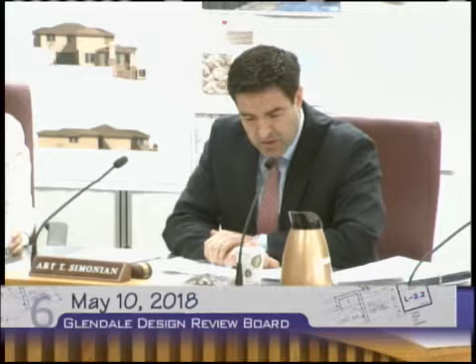Yes, thank you Mr. Chair. This project is located at 3455 Downing Avenue. The request is for exterior remodel and construction of a new 1,066 square foot second story and new porch areas on the ground floor. The existing 1-story is 1,259 square feet, and it has an existing 380 square foot detached 2-car garage, and the size of the lot is 6,500 square feet. The project includes exterior remodel, the new second story addition, the covered patios, and the new front porch, new colors, materials throughout, and windows, etc.

So briefly, the project does have a variance that was approved recently, back in November of 2017, as it relates to the increase in height which would trigger increasing the setback area, so they got a variance for that to maintain the existing setback along the south side.

Regarding the design, staff is recommending return for redesign, and I will briefly go over the reasons why. The project site is located in the R1 FAR District 2 zone. Downing Avenue is located in the Sparr Heights area in North Glendale. As it relates to site planning, staff didn't have any concerns really, so the site planning seemed to be consistent with the existing conditions as well as the neighborhood fabric.

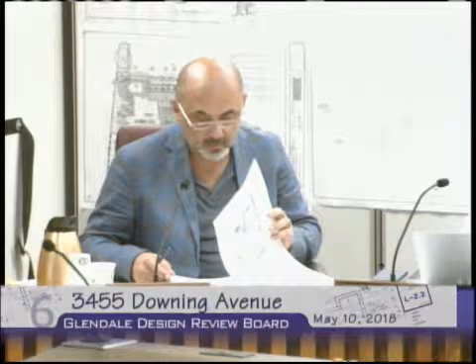Does staff have a copy of the window schedule, or have they provided that before? No, I don't have that at this time. Okay, thank you.

So with that, we'll go ahead and open the public portion. Mr. Girgos?

Good evening, Mike Aragus, 2155 Verdugo, number 614, Montrose, 91020. Thank you for taking the time. We're in agreement with the majority of the staff report, except for a couple of the large items, and I want to address those right on.

We have one additional letter in addition to the exhibit in front of me, which is that the owner went around with the plan. I purposely did it so it had the elevation, the site plan, and floor plan in it. As you can see, all the red dots are the adjacent parcels, all the adjacent property owners who are in agreement with the project and feel it is consistent with the property. I also have an additional letter from the neighbor directly to the north.

Within that, I think we can look at two items: one is the appropriateness of the 2-story, and the second would be the massing and pitches, if you want to group it that way. If you look at the 2-story study...

There are two stories at the end of the block, on the upper block, and just past the 300-foot line there is another 2-story. So it is not an unusual idea to have a 2-story in that neighborhood at all. I've personally done 3 homes on Buena Vista, one street over, and 2 on Rosemary, 2 streets over, so it is not unusual.

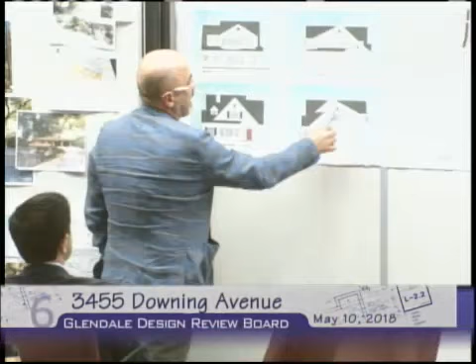So I want to understand what is happening. Why is this there, and why can't this happen? That pitch is reaching to the front wall. The ridge and the roof behind is pitching to the previous.

If I can come up to show them - the pointer's at the corner there. This pitch is relating to the front wall of the house, which is here, so it is pitching up to the front wall of the house.

But when I'm looking at the front of the building, this one is pitching from this wall. There is a break line there, you're just not seeing it - it's right there. There actually is a line, but it's being cut off by this form.

So I'm not sure I understand. That is this one here - that's this right here, is that the ridge? Right, so it's being cut off here, and it hits it partway, which hits it here.

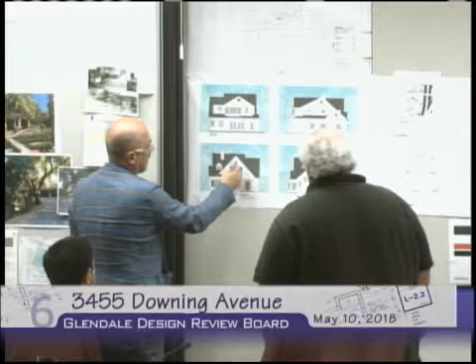But then this is in front of that - this is coming out, not in front of that. So then what happens?

That is the bathroom here, there's a little tucked-in roof, that roof line at the top there. The main roof is coming - this roof here is pitching off the front wall. This section is coming off of the back, this reduced section here.

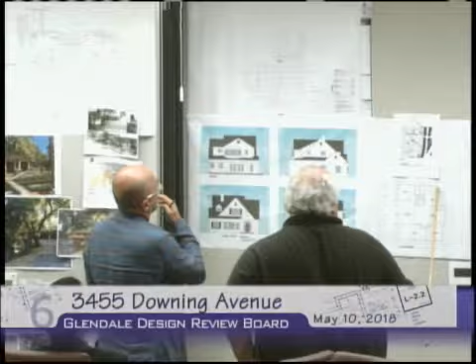So you have 2 pitch points, they're all coming from the back wall. It's shorter on this one than this one, so that's why you have the break happening at that point. That's what's developing the break.

So my other question is, you have all these bump outs that are there, and you're taking out some of these - you're placing windows right on the plate heights, and you're taking these walls out, taking the entire roof off of this building and having these new openings with the framing. These are existing openings - all but this one existing.

There's a bump out in the - if you fix that, then you have to probably reframe that most probably. And then some area here, these are not existing.

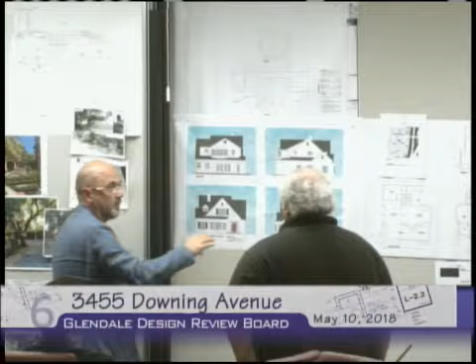So by taking the entire roof off, you took out 50% of the building. So any window or framing opening, essentially you're literally going over the 50%. Well, those are existing doors on the back - that's an existing door, those are existing windows, the only one was one French door. So have you done the study?

50%, assuming that we had existing windows here - these are all existing windows, and there's an existing French door, and we're adding one French door. But did I do a 50% count? Yeah, I did a 50% count. And you don't have a window schedule, right? I don't have one, yeah.

But how necessary is that small dormer at the bottom right side of the roof? It's for the plan, this bathroom. I mean, we could take it out. It could turn into a shed if you wanted to minimize its effect.

It could go, that could go. I like the idea of it sort of balancing the three. If there was a reduction of one, so that there was an open section here, but it could go. I mean, it would be flexible. It could also be a shed if you wanted to minimize the effect of it.

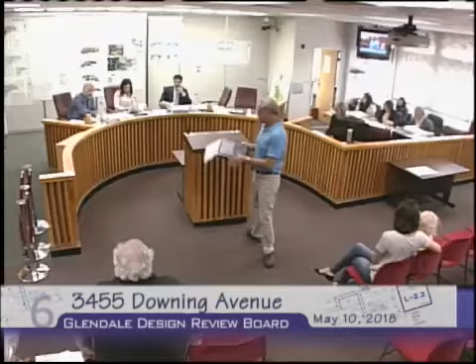Right, it's pretty good. Gabriel Lefevre, 3471 Downing Avenue, Glendale, one of the neighbors. I feel it is appropriate for the neighborhood, and I'd like to see it happen. I see one and two story houses all over, and I agree with what Mike had to say with regards to creating a nice place to live without extending through the backyard. You have to kind of go up to be able to save some space for the rear yard.

And you live north or south of the property? I'm the top dot on the corner of Sunview and Downing, on the left-hand side, 3471. Great, thank you for taking the time to come down.

Next speaker is Abigail Imburgia? Wow, you guys have a hard name, I know it's a hard one to pronounce, Italian. Today it's Italian, it looks like Imburgia. Well, welcome anyhow, Abigail Imburgia.

I live at 3508 Downing Avenue, so I'm on the right side of the block, three up on the right. I feel like it is appropriate. I've been in the neighborhood nearly 15 years, so if I look at the neighborhood as a whole, not just Downing Avenue, on the lower block there are two two-story houses, and on the upper there are two. I think this is by far the most aesthetic one that we will see if it does get approved. Even going throughout the neighborhood, there are some great ones and there aren't. I really feel like this would be a great addition. From my house, you probably haven't seen it, but they've put up the...

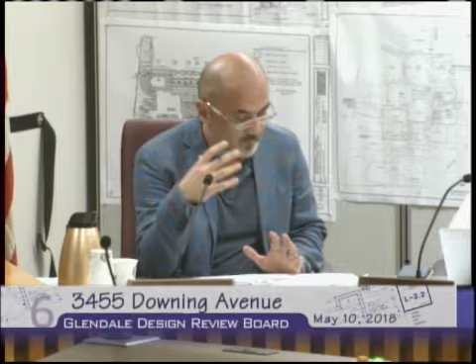Okay, Mr. Malakian, you want to start us off? Sure. So as usual, Mr. Garagos has done a really nice design, and it's always been a very consistent, overall cohesive design that he proposes.

It's always challenging when you try to take an existing structure, existing bones of a structure that is completely designed and intended for a different style of architecture, and try to incorporate that into a whole new style and whole new character, adding a second floor, utilizing a lot of the openings and trying to make that work with the function that is. So I commend you for that.

I appreciate all the efforts that has gone into trying to incorporate some of these roof lines and some of these windows and openings that do exist, and the new ones that have come together. I also understand the concern that staff has, which I kind of have the same concern.

Obviously this is not going to be the only second story, as the homeowners association representative is here, and I don't oppose a second story addition. I don't oppose even if it's setting a precedent in that street context of having the first second story, as long as it's done appropriately, as long as they're cautious of what they're doing and conscious of the neighborhood and the adjacent neighbors.

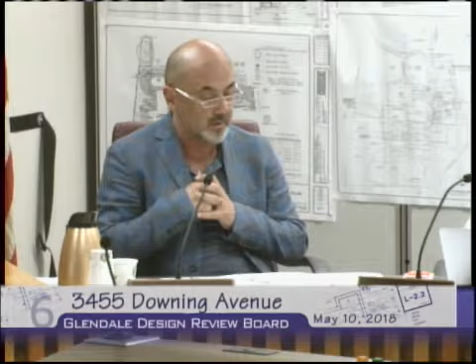The section that I pointed out, having the ridge come to the end of the wall there, I understand, but is it necessary? Can it change? I don't know. I want to see what happens if we do remove that. What happens if - and if I had the sections, then I would have probably guessed right now.

There's certain conditions here that make sense inside, but outside, for example, the dormer, the small little dormer window that is next to the restroom, that is right against this larger volume along the front - it's kind of out of scale. And then you got this, randomly, a chimney coming out from further back.

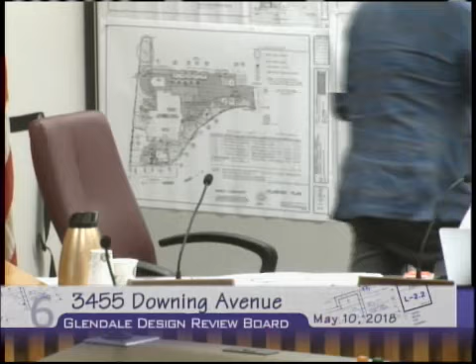So you have these elements there that I think takes away from the simple, clean look that I think it's asking. Possibly if that dormer had a little bit more space between the ridge, and this was moved in so that it actually sits alone on its own and has a volume. So there's certain things that may be improved.

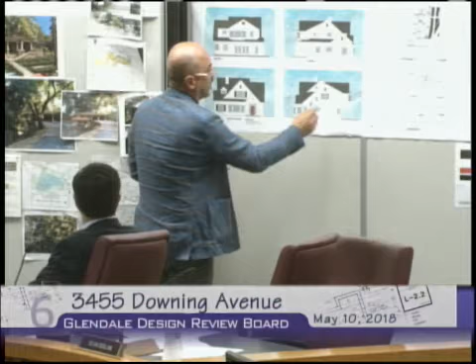You have a window here that you want to push up and go right at the ridge point there. I understand why these are there because of the stairs, but again, does it make sense? Can it be one larger window that plays with some of these types of windows that are there, or can it be just one round? I don't know what these are, but these are just fine-tuning some of these elements.

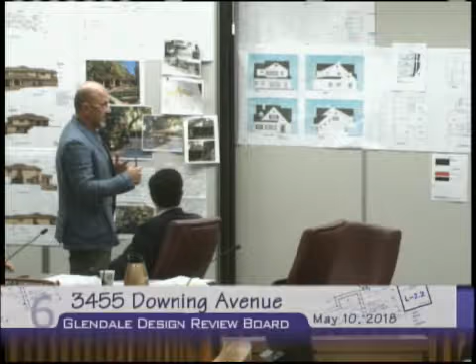I don't know if bringing all these consistent pitches in will help, but I hear the architect speaking, Mr. Garagos, and I understand, it governs for that, the style that we're looking for. So it's not bothering me.

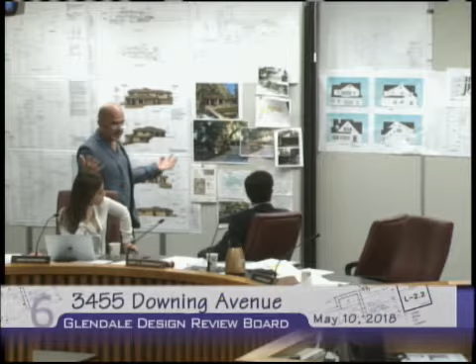But what is bothering me is the over-excessive mass that has been created by the design in relationship to the neighborhood and the neighbors and everything. So for me, possibly if we can cut this off, lower this, literally make this - I don't know if that would help the situation, or we may come back and say what we had originally was a better design, we made it worse. So honestly, I don't know.

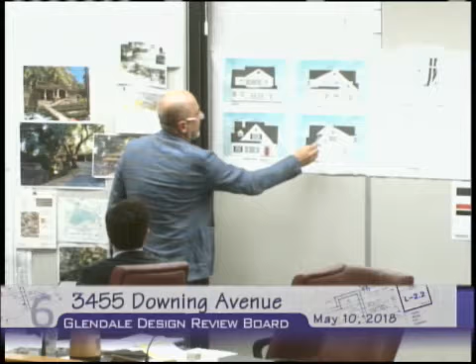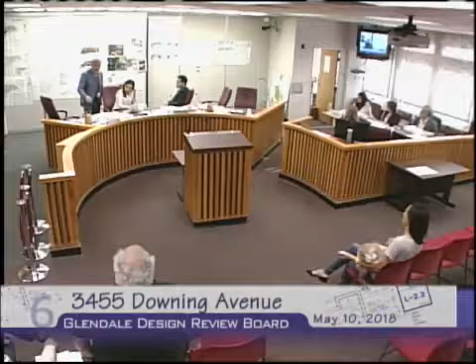And can it be that maybe we don't want to have this, and somehow - I see these happening, but then from the front, when you're looking at this, you're looking at the elevation. You want to see the perspective, and that's another thing - we have an older perspective. It doesn't have the windows and everything else, but you can see everything is happening.

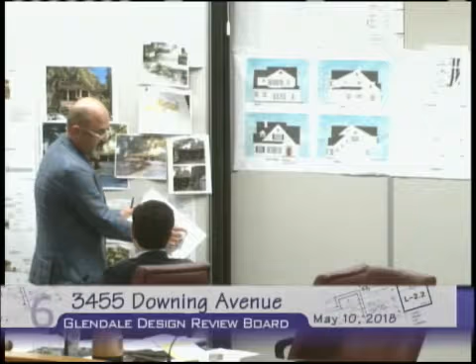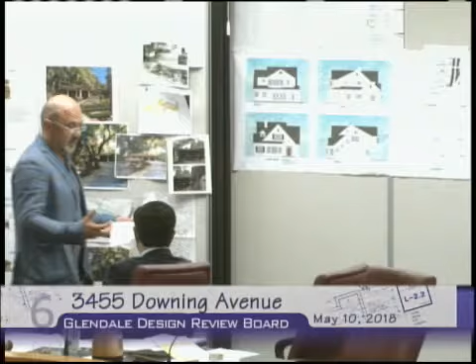I like the roof lines that are coming, their volumes, but then the smaller little volume that is coming out for the entry - does that really help? It looks beautiful from the front, but when you look from the side, it's just very small. So those are the things that may need some improvement to make this feel a little bit less massive rather than what it is now. But again, I think it's a very nice design.

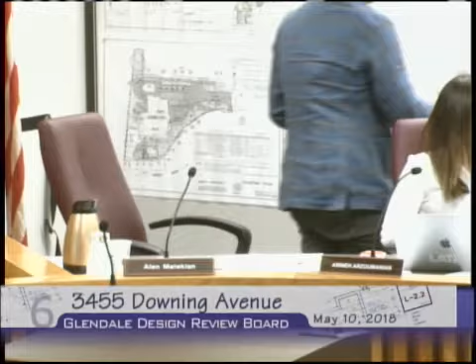It's kind of unfortunate for me to guess on a lot of things. I would have liked to see the existing elevation compared to the proposed elevation, to see what is actually happening. Because to me, the bay window that is there, the roof line, it seems like we're trying to reuse the existing, but it's not. It's actually a brand new roof because it's just not possible for it to work. So that's where the question comes: what's new and what's old? How much of that is being affected? That's my concern.

But in general, going down the list, I agree, and I think reduction of the mass would help the project, but there's not much we can do about reducing this because of the style we're looking at. We can't completely redesign it because I really like the design, I think it's a very nice design. But what is going to happen if we lower the ridge line? What happens if we get rid of that upper ridge portion? Is that going to help? I think it would, but that's just me talking, and I can't imagine what impact it will have on the design.

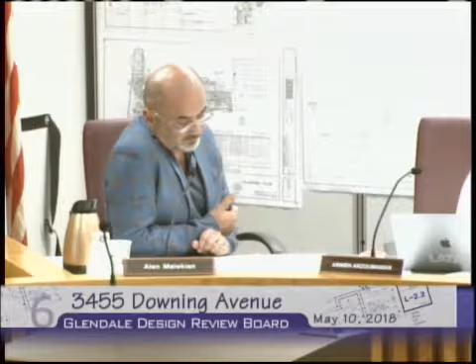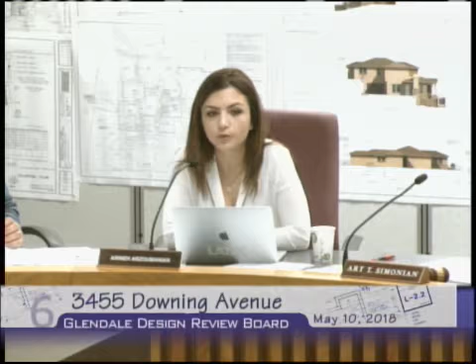I agree with you. As far as the mass and the scale goes, getting rid of the ridge and making some little changes would definitely help. But as far as the overall design, it looks fine. And I understand if you make those changes to reduce the mass and scale, it may jeopardize the style, so it's going to be a balance. Our architect would know better how to do that. I wanted to thank the owner for reaching out to the neighbors, we usually don't see that happening before they get up here, so I really appreciate that, and I appreciate the neighbors coming down here expressing their support. Overall, it's a great design, it seems to fit the neighborhood.

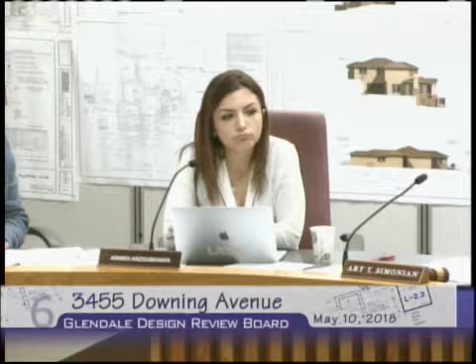I tend to agree with Mr. Malikian. I understand that the mass and scale can be reduced, but how we're going to do that and what's going to happen next, you can't really tell. So I feel like simple modifications to the details happening right now in the design can address that and it would be fine.

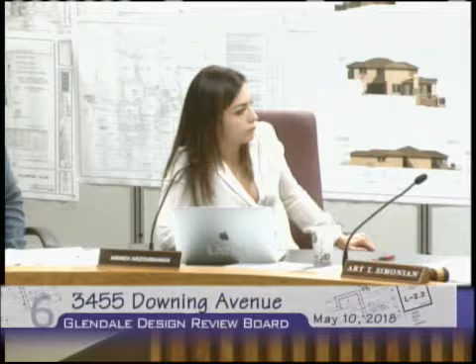Thank you, Ms. Arzumanian. I'm going to echo and say we very much appreciate you reaching out to the neighbors. It's always nice when that happens, and also for the neighbors taking the time to come out and support it, because most of the time what ends up happening is people coming down and objecting to a design, as opposed to people taking the time, especially with young children, to come by and encourage an owner and a design.

I agree with what's been said. I think it is a well designed concept. It's not an easy one, especially when you have the openings at the lower level and you're trying to match some window lines above it, and then trying to fit certain bedrooms within a certain roof line that needs to be somewhat centered. It is very difficult to make this work with the style that's been picked. Once you have these overarching pitched roofs, it's very hard to place spaces within them on the second level.

I tend to go down the route of maybe approving with conditions as opposed to returning for redesign. I also think the roof plan could be simplified. It took me a little while to get my arms around the design because of the different roof pitches. When I'm looking at the perspective, which to me is the most telling part of the package and the rendering, that's really where it comes together for me, because the two-dimensional aspects, especially with some of the lines disappearing on the roof where one plane stops and another merges, are very hard to comprehend without the rendering.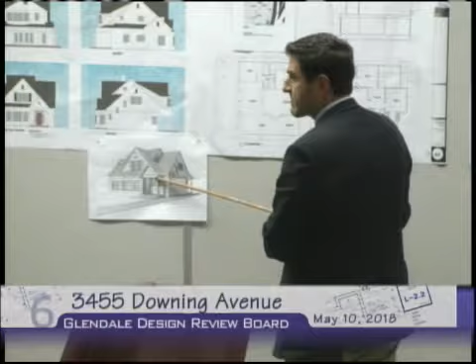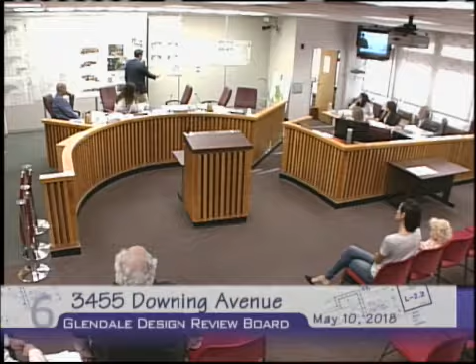I agree with Mr. Malekian. This additional pop-out on the porch seems to convolute things, and it could probably be simpler if this roofline kind of, I should probably stand on this side so staff could see it. If this roofline kind of continues, I think it'd be better served if maybe this top portion was removed and then we had a simpler ridge.

And Mr. Malekian alluded to it. Now, we don't have enough sections to understand what that would do, but perhaps they could work with staff on that. And I do think that this dormer, the way it pops out, is unusual. That would be the small dormer? The small dormer here, yeah.

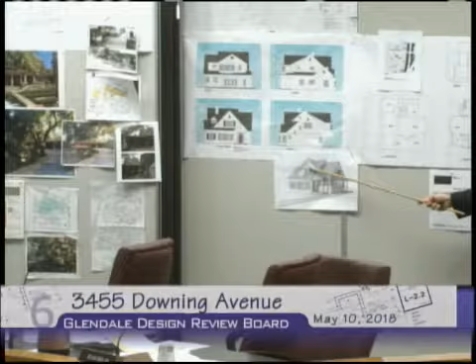I think in general, though, where we would like to see this line up, the lower level and the upper level, I think it'd be too difficult to do while still trying to keep this bedroom on the top level and still trying to get this roof pitch. So I wouldn't want to impose that.

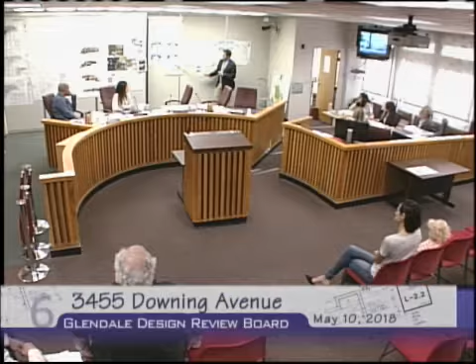But I think some of these simpler approaches of reworking these windows, reworking the porch where it doesn't really pop out with this extra roof, trying to get rid of this little dormer and continuing the ridge, or maybe deleting that dormer. I think these are simple enough things.

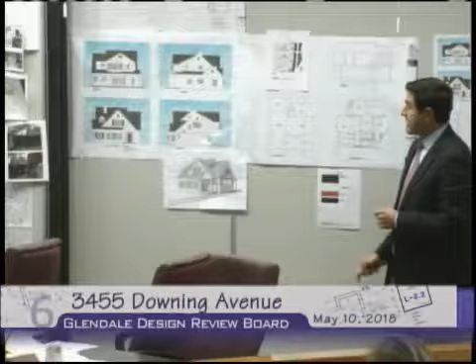Now, I don't know the removal of this ridge, what that would do to the space. I have no idea. And if it comes down to it, if we gotta prescribe some conditions where it's just not possible based on sections, where it becomes an unlivable space, then maybe they need to either come up with something else or work with this. But in general, those would be my comments.

The rest of the conditions that staff has set, conditions 3 and on, seem reasonable. So I guess the first place to start is, is there support for this?

So my question to you and the staff is, with these conditions, would staff be comfortable rather than, I know there is a reason for you guys requesting a return for redesign. Would you guys be comfortable with the conditions that we put in or the changes that we did?

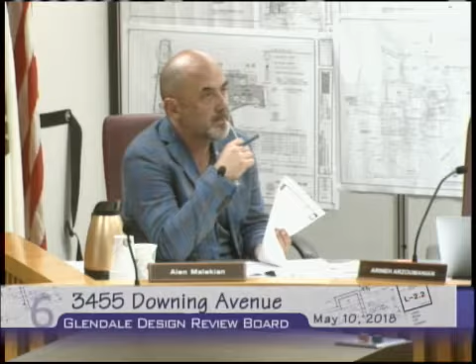If the conditions are as straightforward as I'm writing them down, sure. Because it opens up some uncertainty, and I heard Mr. Simonian say if the rooms aren't livable and that changes the design dramatically, we'd have to then bring it back to you. We can do that. I'd rather have a little more certainty visualizing what you're envisioning.

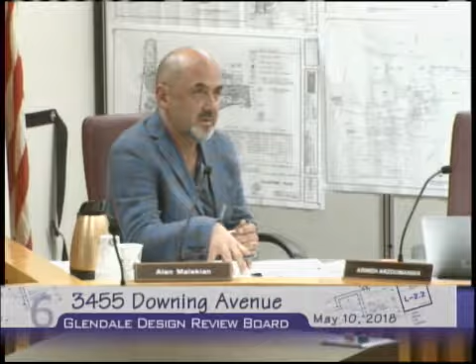See, the thing is, and I was going to make a point of this, I want to make sure, I don't think it's fair to all the applicants that come in front of us that go through all the headache and all the requirements that they have the list of requirements. And when we are getting not a complete set, and the set that we have, then we have to guess on certain things, and we have to guess on the conditions that we're putting in, what the result is going to be.

Can you elaborate a little bit? Because I mentioned the lack of a section, but there is a section, and there's a roof plan, so it sounds like you want, because I went through the list. Yeah, the drawings there, the drawings that we have, and it's not staff's thing, but it's more of the applicant that needs to.

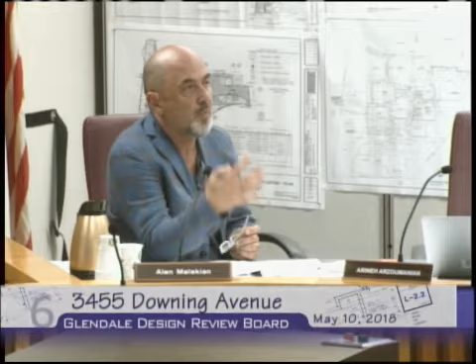So additional information. Exactly. So applicants. So I'm not trying to say staff has taken this, but what I'm trying to say is that staff should tell the applicants that it's a complicated design, or the information you need to give more so we understand what we're reviewing. Let me give you an example.

Like, for example, this dormer, right? So there's no way I can understand what the impact of this dormer is other than just looking at this. But in a true drawing, an accurate drawing, you would see part of this dormer on this plan. So you would actually visualize. I can see this three-dimensionally.

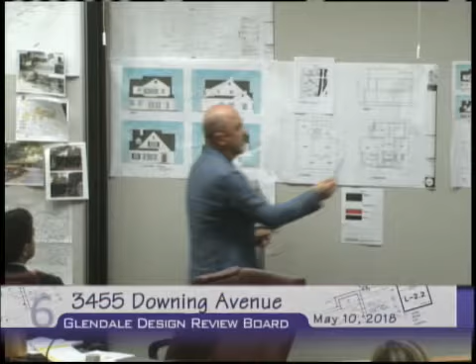Or when you're looking at this attic and this window, right? So if you're cutting this through here, then you're going to see part of this roofline coming up from here. So you can see, understand, and feel what this thing is doing. And so when applicants are not really presenting the big picture for us, then we have to start guessing on certain things, right? And so one section meets the requirement, right?

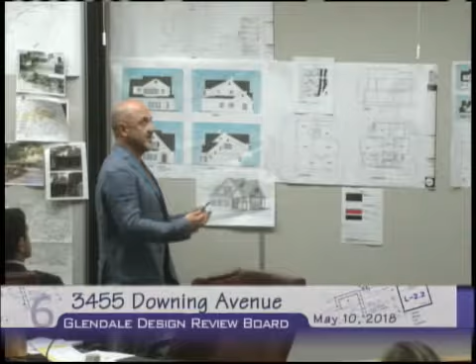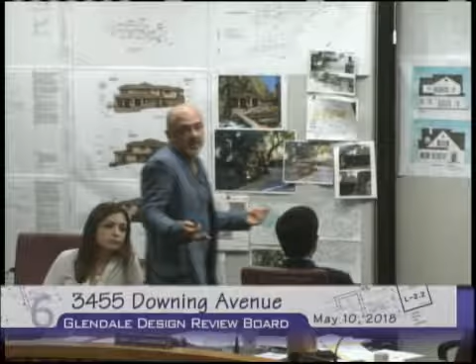Staff should tell them, listen, if you want this to go through smoothly, maybe add a couple more sections, maybe add some details, maybe add certain things for us to understand. Because right now if I say let's remove this, like Mr. Simonian said, I don't know what it does. Can they put it somewhere else? Is that going to impact things? Or if we lower this, how is that going to impact the overall design?

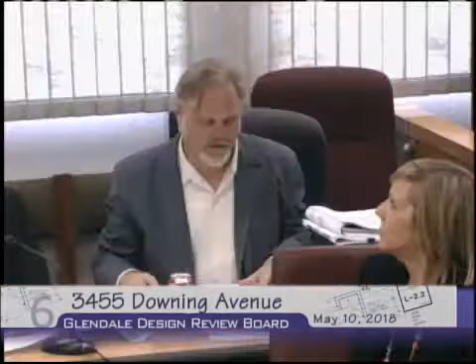Going back to the question, part of our problem, we could certainly do this with an approval with conditions if it's these kind of smaller things you're asking for. We agree with what the commission or board has said about the quality of the design. We found aspects of it a little awkward, but overall it's a nice looking colonial revival kind of house. But we were concerned about the massing at the second floor being quite at odds from what the board typically approves and from what our guidelines tell us to do.

So if you're telling us that you're comfortable with this massing, that transfers into future design review meetings we have with applicants, where we could say the board has been comfortable with this kind of thing, and maybe we don't have to push second floors in as much as we often ask people to. So that's the place I'm a little less comfortable unless you give us clear direction that you're really okay with the verticality of the side facades.

I'll speak for myself, and my colleagues can speak for themselves, but I'm okay with the second story. I appreciate staff's comment regarding massing, and that's my concern as well. My recommendation, and I think we all agreed, is to cut the upper ridge to lower that.

The concern that I have is I don't know if it will do its job—whether it will reduce it enough for me to be comfortable by lowering the ridge line or changing the pitch. Those are things that are going to impact the design itself. With my limited knowledge of what is happening with the design, without knowing all the roof lines and everything that's coming, I thought that if we take the upper portion out, maybe that will help. I don't know.

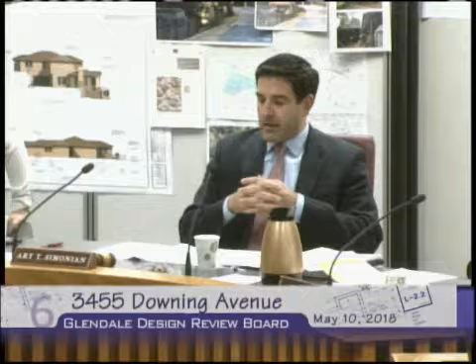I think more or less we had similar conditions as far as concerns and ideas. I'm hearing from staff that they will be able to work with the applicant, and I'm hoping you get some of these conditions and are able to come to staff with a design that is livable, that more or less doesn't change the overall style that everyone's so happy with. Address what we're pointing out. Now, if at the end of the day staff is unable to come up with some sort of compromise, it would always come back to us anyways. So I'd suggest we put together some sort of condition based on our comments, or we could just have Mr. Platt read what he's got at this point, and then if you're all comfortable making a motion, we could move forward on such a case.

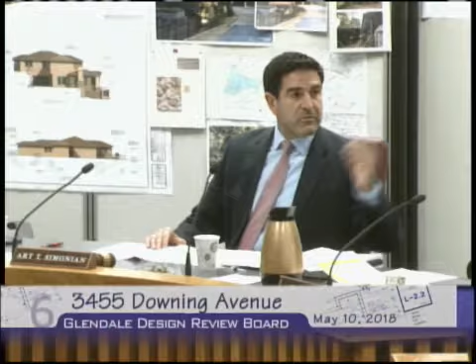Okay, can you please go over the conditions that you have at this point? Sure. It's a little scattered and may get a little repetitive, but I'll go through everything I've got and then we'll try to condense it.

In general, simplify the roof plan. This would include reducing the ridge height of the higher portion of the roof to match the ridge height of the adjacent side of the roof. Either delete the small dormer on the front roof, or depending on how everything pans out with the changes, find another location for it. That's hard to imagine, so I picture deleting it might be the way that ends up going.

Looking at the side facade, I'll call it the right-hand facade with the stair windows, there was a call to simplify that facade, particularly the windows running up the stairway, possibly with a single decorative window in that location.

We won't need to ask for more perspectives. I wrote that down, but we wouldn't ask for that for staff review.

The front entry volume, the board doesn't like the way it's kind of just pushing out. It's a very shallow projection. So I think the idea is to delete that feature and find some other way to provide coverage at the front entry.

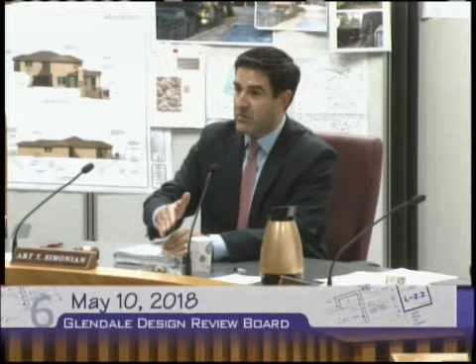Sorry about that. So we only have quorum until 7 p.m., and this is what I suggest. I suggest that we go through this as quickly as possible and everybody gets a chance to speak. And if we feel as though we're cutting it too close, then we'll basically continue the matter, and we're going to cut it off at that point where the public has spoken, the architect has spoken, the rebuttals have occurred, and it's a very clean break.

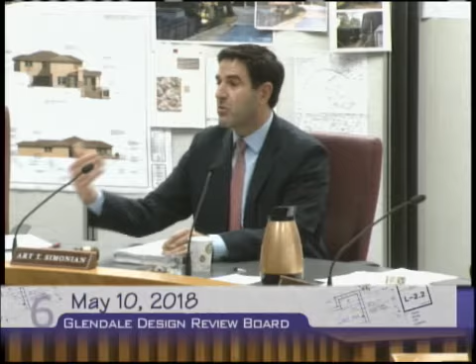At that point in time for us to move on and continue it. The other option would be, instead of providing the public with 3 minutes each, we would limit it to less time, 2 minutes. And if you've already heard what you're going to say, you would simply get up and say, I'm going to basically say what's already been said. So with that, I oppose the project, or I support the project.

I'm inclined to keep it at the 3 minutes, but if I get a lot of nods from everybody saying that 2 minutes is fine and we'll try to hurry it up, we could also do that. I'm not getting a lot of nods. So with that, we'll continue with the 3 minutes each like we always do, and if we cut it close, we'll continue it to a date certain.

So with that, we're going to open up 1627565, and our case planner is Ms. Ezzati, so please take it away. Good evening, and thank you.

This is a proposal to build a new 2-story, 4,114 square foot single-family residence at 1829 Kirkby Road in the R1R zone, FAR District 2. The new house will also feature an attached 3-car garage. The project involves demolition of the 2 existing residential structures on site, construction of a new pool and outdoor patio areas, and associated grading. The site is a 15,880 square foot irregularly shaped lot with double frontage on Kirkby Road.

During my presentation, I'll refer to the southern, wider portion of Kirkby Road as Lower Kirkby, and the portion to the northwest where the road is narrow as Upper Kirkby, just to clarify the two. The project site is currently developed with 2 residential structures: a single-family house built circa 1911, and the existing main house that was built in 1924.

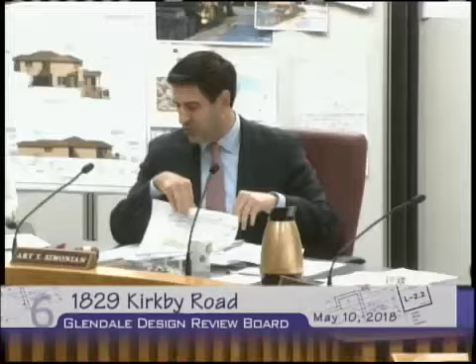Good afternoon, Mr. Chair, board members, city planning staff. My name is Vartan Jangosian, 1224 East Broadway, Suite 202, Glendale, 91205. I'm the designer of this building.

Vista presented everything, and I'd like to add a little more. We worked very closely together, considering and preserving the lot character, making a smaller grading job. On this project we have only 190 cubic yards of grading to do, and mostly it's under the footprint, which isn't even considered a grading job.

We worked very closely to minimize touching the character of the property, using stone we have on the property for veneer purposes, matching the character typical for that area. The lot itself is a double lot compared to surrounding lots, and we tried to work and make a better design, considering and following all the recommendations and conditions of the planning staff.

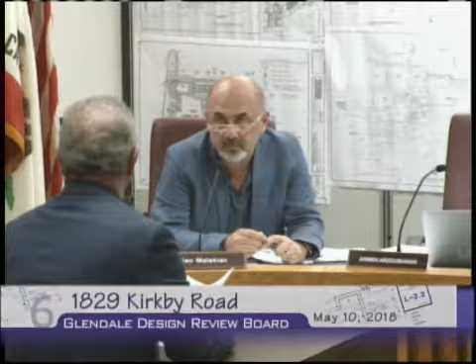If you have a question, I can answer. Do we have any questions? Can you categorize the style of the building? The style is craftsman, which is what the existing house was as well, and on the lot we currently have two buildings.

I wouldn't say the existing buildings have much valuable character, but it is a craftsman character. We have a two-story guest house in the back and a two-story house which is very old and looks like it was remodeled several times, with nothing left of the original character.

We are removing two buildings, and the footprint is almost the same as what we're putting in with the new house. Regarding one of the recommendations about the driveway paving, which is existing brick paving, we try to preserve that too, but if needed, we can reduce it and keep some people happy.

Do we have any other questions? One last question — you're proposing wood chimneys, wood burning fireplaces? No, that's not what's shown on the plan. We cannot do wood burning, it's gas burning. Maybe it was misspelled, but nobody's going to allow us to use wood burning anymore.

And when you say double lot, which lot — is this part of the property, this lot? In the APN it shows like it was two lots tied together, these two. Right now it's considered like one lot, but it used to be two lots tied together. But you're not doing any portion of the building on—

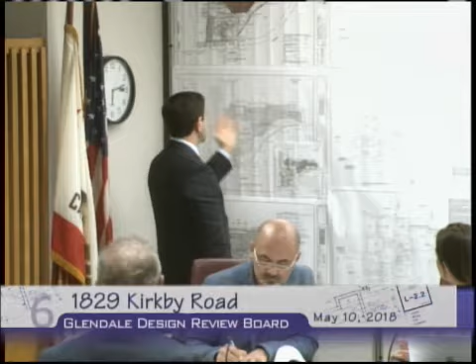There is a house right now that belongs to someone else. So when you say double lot, where is that — that's what I'm trying to figure out, where is the double lot? Even the existing driveways show it used to be two lots. I don't know exactly where the separation line is, but I know even the county assessor's office shows it was two lots tied together a long time ago.

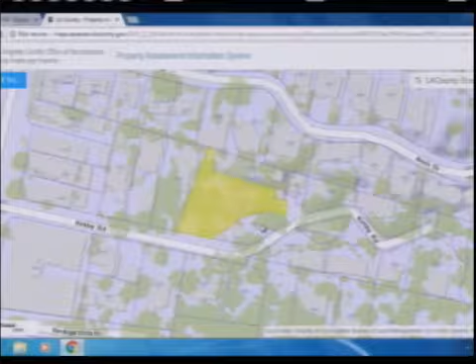So item C is the site plan shall show preservation of prominent natural features, native vegetation, and open space in a manner that is compatible with the surrounding neighborhood, minimizing the alteration of the terrain necessary for the development. It's just my opinion that this request to build 4,115 square feet home does not appear to meet those standards as it applies to the houses in the community.

Our house was built in 1911. The majority, this was not a planned development, and there's not much of a way you can change the street or any of the other houses around there to make it conform to anything normal. What they're talking about is a patio.

Since we have owned that property, that was a bridge that went from the street, and the bridge was made back in the 60s by some people that were elderly and could not go up the stairs to get to their house from the site where they're saying the garage and driveway should be, on the lower level of Kirkby. So a bridge was put in there to help those people walk across.

Maybe 30 years ago, I don't have the date, I don't have the time, but I have a picture, that was illegally backfilled by the owner that was up there. Thank you for that history, by the way. It's very helpful to find out about that bridge. Thank you. Sandra Brahmi.

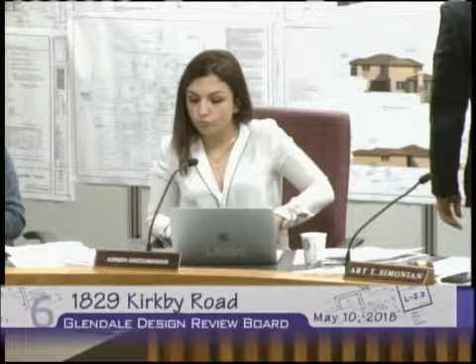As far as the parking and garage goes, I agree with the staff. I think the architect strove to minimize removal of the trees. So, I mean, I think that's the way to go. In order to minimize the impact on the trees, this was the right decision.

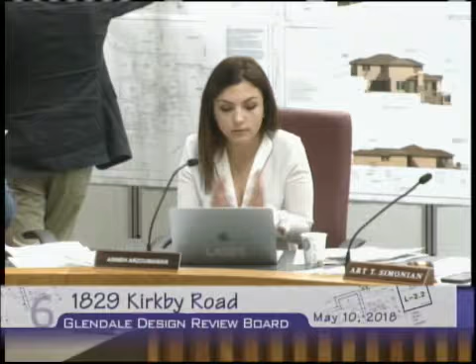I like the design. I think it does fit the neighborhood, and also as far as the mass and the overall volume goes, it's a big property in that neighborhood, and I don't know how it could be dramatically reduced.

That's where I'm at. I don't have any particular concerns. Thank you, Ms. Arzumanyan.

Thank you, everybody, for coming out and sharing with us the problems associated with this specific street and also some of the history. It's very helpful for us.

I agree with my colleagues in that the site planning and the way the house is situated, and the way you as the applicant have worked so diligently to reduce grading, is the right approach. We always like it when architects take the time to work with the existing contours of the site to minimize grading, because especially on streets like this, when you have many truckloads of earth being excavated and removed, it is a serious hassle for the adjacent neighbors, especially on a narrow street.

And so minimizing grading is a top priority. The architect brought up some thoughts as to why the garage was placed at upper Kirkby as opposed to lower Kirkby. It seems as though the majority of the comments brought forward this evening have been that the garage being placed at upper Kirkby creates an issue as far as access, etc. On the other hand, that's what's fun about this board, right? And I say fun, and I might be facetious, in that we get to look at things from all angles.

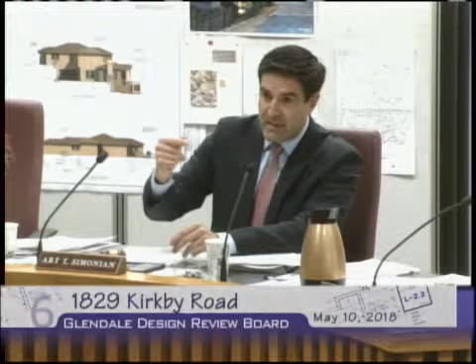Now, on the other hand, I think if you are moving the garage to upper Kirkby, you've got to have adequate turnaround space within the property, so owners are more inclined to pull into the garage as opposed to park on the driveway. And when coming out of the garage, you'll be able to turn around to leave, in which case you're not impacting the neighbors as much. Frankly, you want that as an owner, because then you can park your cars inside the garage as opposed to leaving them outside and having to get dirty all the time.

So I think if the garage is kept in its upper portion, then those radiuses need to be massaged to provide for more of a radius, because it is a very impacted portion of Kirkby. So those are my thoughts on Kirkby.

Insofar as the style is concerned, I think if you squint your eyes you kind of see the resemblance of a craftsman, but it certainly is not a craftsman in its true sense. If that is the style we're going after, then we need more craftsman elements to it, especially because it's a large home. It needs to look more like a craftsman as opposed to somewhat of a craftsman and somewhat of a Mediterranean, something in the middle.

Overall, though, the way the architect has designed the mass and broken up the building, I think is very successful. When I look at the elevations, the mass of it and the bulk of it works, and the way you've done the access and the stairs, and worked with a very challenging site, is positive. So overall, I think I support the general site planning.

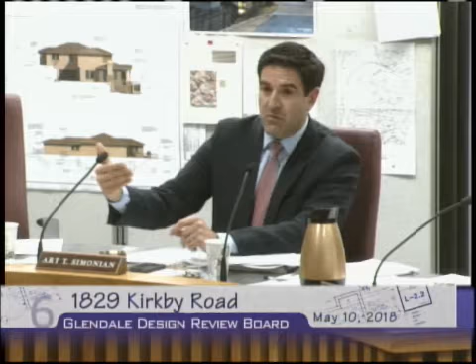But as I indicated, I would work more with the turnarounds and how to make that garage as compatible as possible, so the owners are motivated to go in the garage, park inside, and not have to fear getting hit every time they're backing out. Insofar as some of staff's comments, the smaller comments, I think are spot on.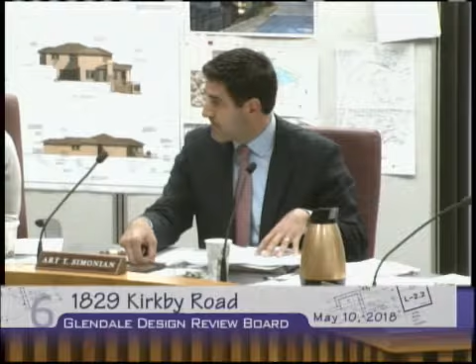From staff or? So, did you write down the stuff that we discussed? I tried, did my best.

Can you share with us some of the conditions in addition to what's already typed out for us here? We talked, before going into the style, about making sure the driveway has adequate turnaround space to make the garage usable. It looks like it may have that, but we'll do radius checks and make sure that's true. I think what the architect has designed meets code, by all means. I don't doubt that, and from what it looks like, it does meet code.

But I think it needs to go beyond that in order for it to really work with that blind corner. So that's the thought there, without dwelling on it too much.

Yeah, there is a bit of a hammerhead, so we can see if that's going to work and what else they could do. In terms of stylistic changes, the things I heard were, in general, just bringing this design closer to the standard kind of features we see on traditional craftsman houses: a lower pitched roof, bigger overhangs on the eaves, exposed rafter tails, which could entail, for fire reasons, heavier timber or whatever it would take to achieve that and meet code. The porch, the entryway area where there's this little gable, should actually have the entire porch embraced by the roof rather than have this separate little roof.